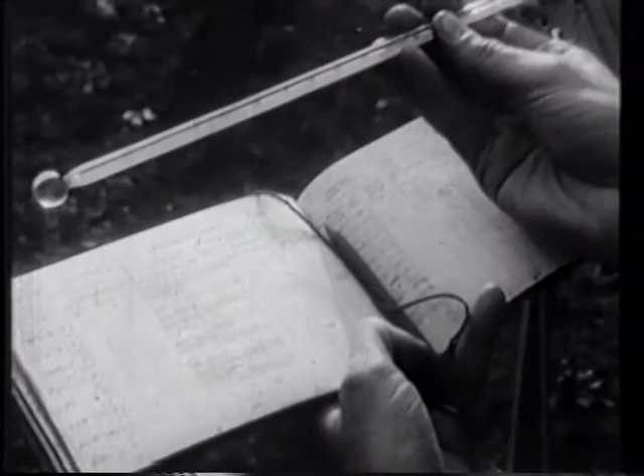If we want to take the temperature of the air, or of the human body, or of the baby's milk, we use an instrument called a thermometer. Sometimes we want to control temperature and keep it constant.

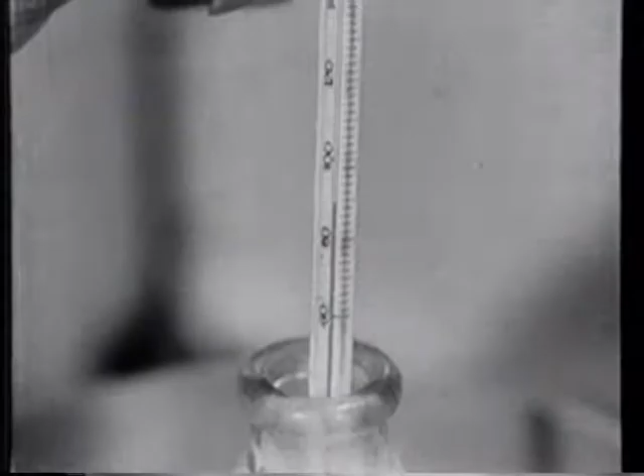For instance, this tank contains tropical fish. The water in the tank must be kept warm, or they will die. To keep the water at exactly the right temperature, we use a regulator called a thermostat.

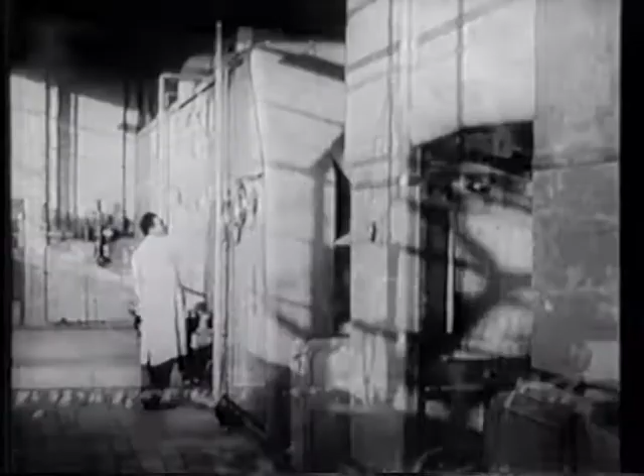Thermostats have many different uses. For example, in the Royal Festival Hall in London, these gas boilers, which control the air temperature in the building, are thermostatically regulated. And here, in this modern gas-fired bakery, a thermostat ensures that the bread is baked at the right temperature.

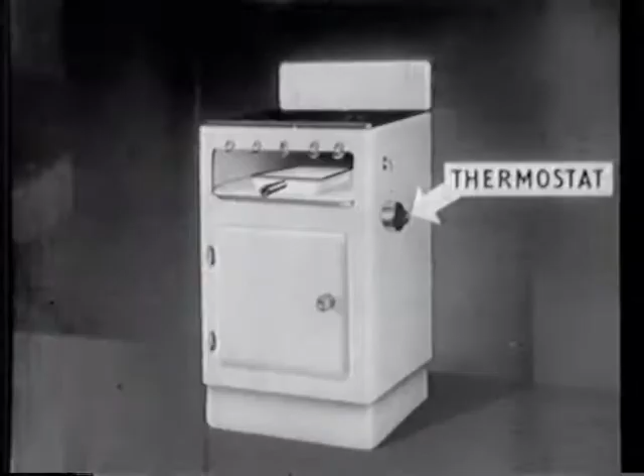But the most familiar type of thermostat is the one on the domestic gas cooker, which is used to control the temperature of the oven. All that can be seen of it from the outside is the setting dial, which fixes the temperature inside the oven. The main part of the thermostat consists of a rod fixed inside the oven where the heat of the burners can affect it.

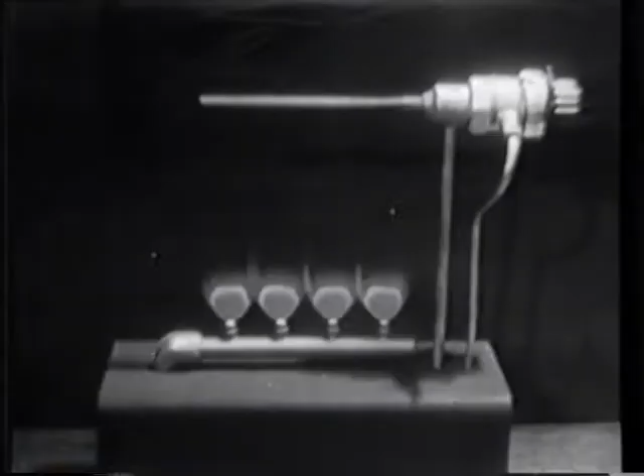This model shows the effect of heat on a thermostat rod. When the flames have heated it to a given temperature, the gas supply is cut down. After a while, the rod begins to cool, and the gas supply is again increased, thus keeping the temperature constant.

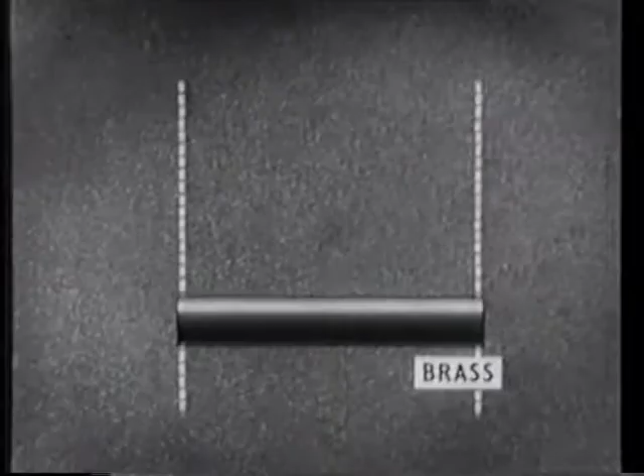The working of most thermostats is based on the fact that metals expand when heated. Some metals expand more than others. If we take a bar of brass and heat it, we can measure the amount of expansion.

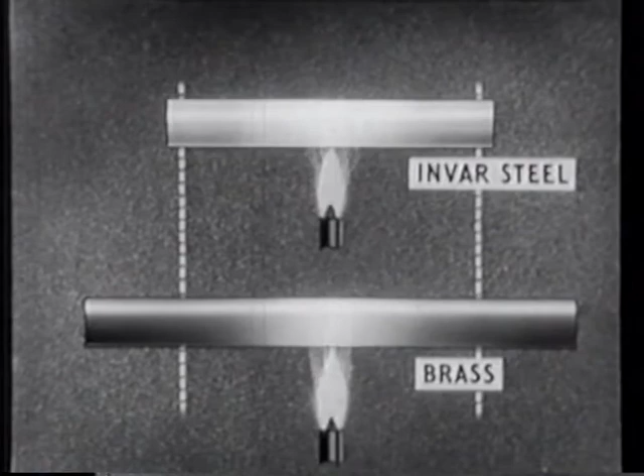Now, if we take a bar of Invar steel, exactly the same length, measure out a section of it and heat the bar, we see that although it becomes longer, the increase is very slight compared with the brass bar. In fact, the brass bar will expand as much as 18 times more than the steel bar.

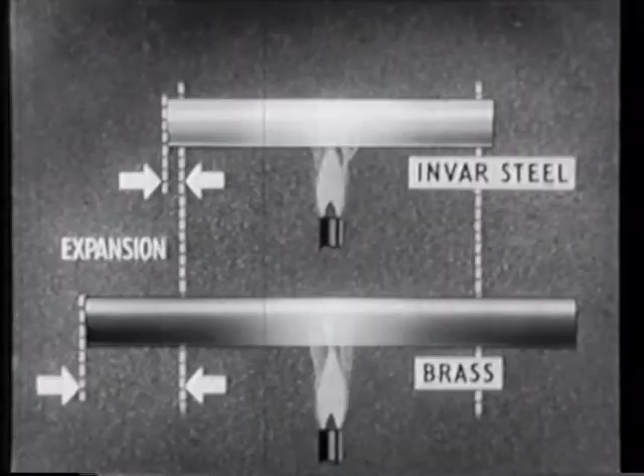This principle is made use of in the oven thermostat. We begin with a brass tube, inside which is a steel rod. The rod is fastened to the end of the tube and moves with it as the brass expands.

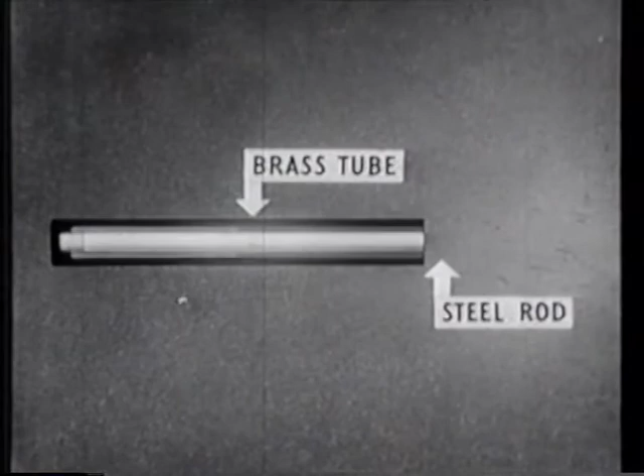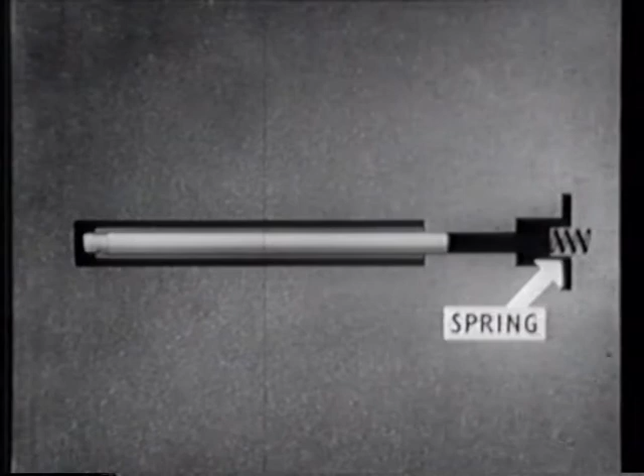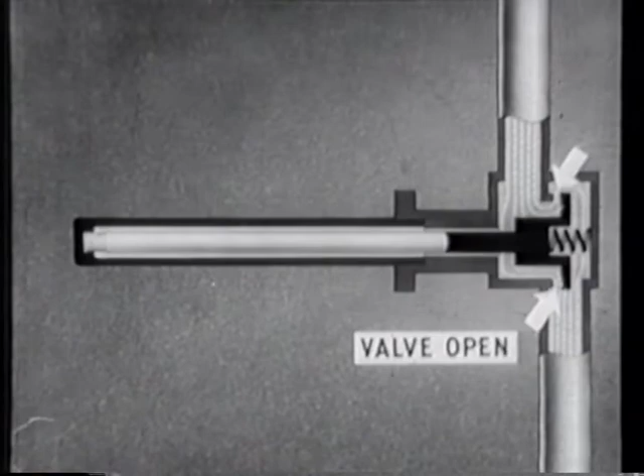At the other end of the steel rod is a valve held in contact with the rod by a spring. This valve is fitted into the gas pipe leading to the burners. When the oven is cold, the tube is fully contracted and the valve is open. As the brass tube becomes hot and expands, drawing the steel rod out with it, it closes the valve and cuts off the gas supply to the burners.

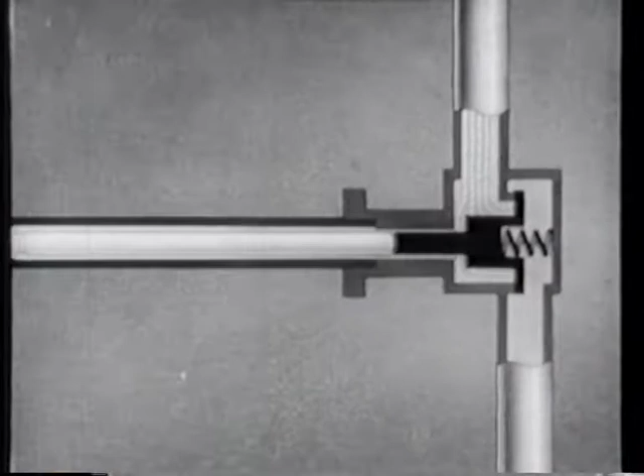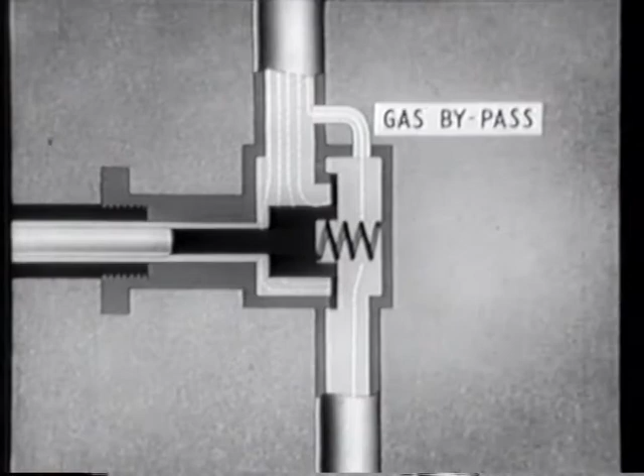To prevent the flame going out completely, a small pipe carries some gas round the valve. This is called the bypass, and it serves to keep the burners alight when the valve is closed. In practice, this bypass is built into the thermostat unit.

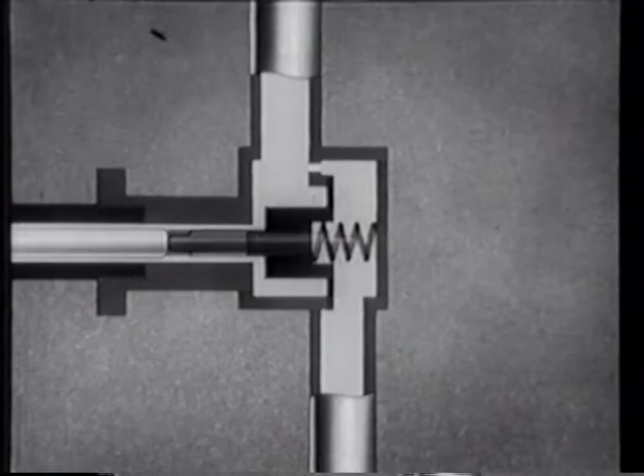For the practical use of the cooker, we want to be able to vary the temperature according to the kind of dish to be cooked, so another piece of simple apparatus is included. This is an adjustable screw, which is attached to the valve at one end. The other end of the screw is attached to the regulator knob.

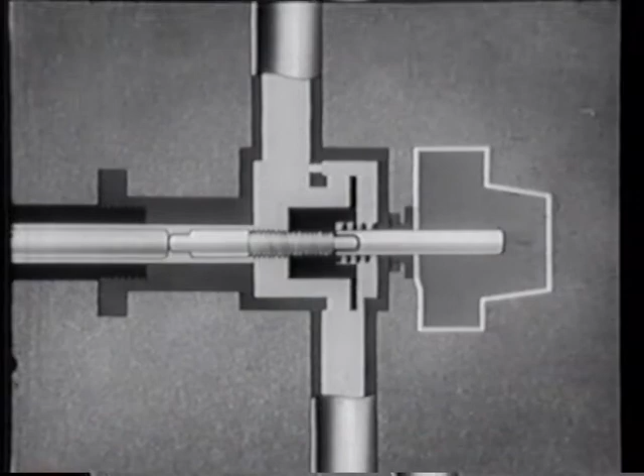When the knob is turned, it causes the valve to move in and out, thus adjusting the distance the valve has to travel before closing. The knob is marked with numbers, which correspond to fixed temperatures at the top of the oven. Here it is at number 7, a medium oven temperature.

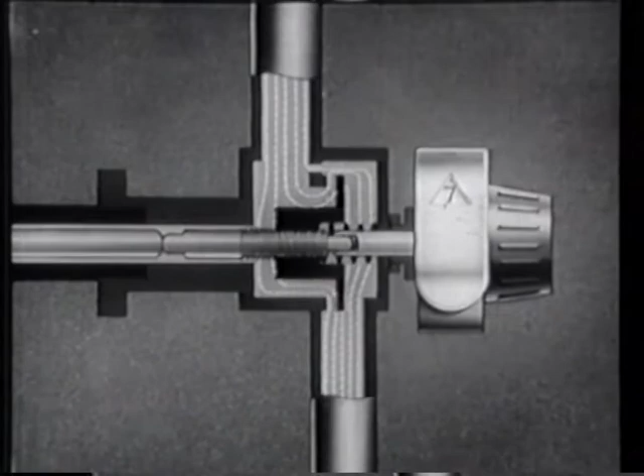When this temperature is reached inside the oven, the valve begins to close and cuts down the flow of gas in the same way as we saw in the model. If the oven door is opened, the temperature inside falls. The valve opens, and the flow of gas is increased until the temperature is restored.

At a lower setting, the action is the same. But the valve is not screwed out so far and has therefore less distance to travel before cutting down the gas, thus keeping the oven at a lower temperature.

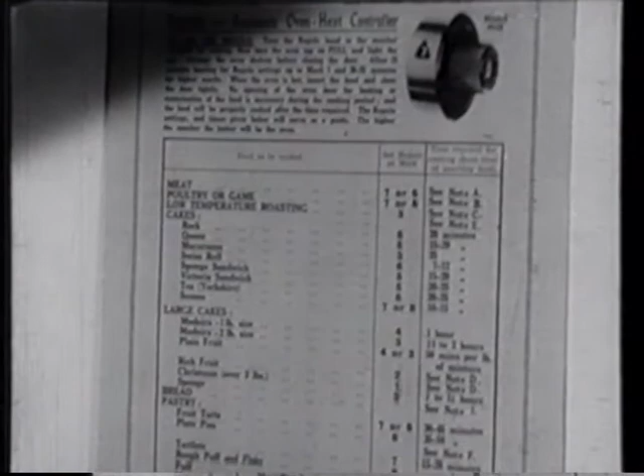Each thermostat setting corresponds to a specific oven temperature. These settings and temperatures are standardized. A chart supplied with the cooker shows the correct number to use for various dishes. Once set, the thermostat controls and maintains the correct temperature during the period the oven is in use.